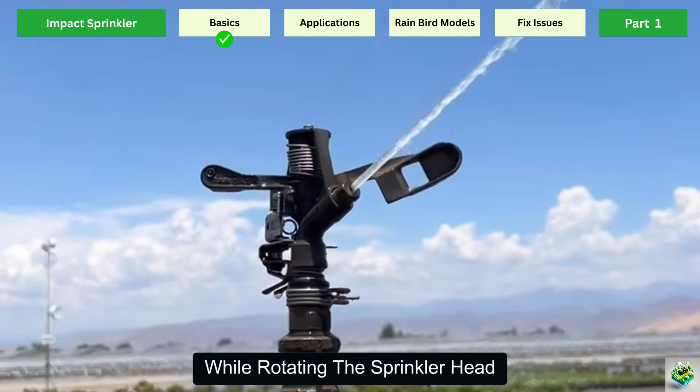Part 1. Understanding impact sprinklers. Impact sprinklers are instantly recognizable by their distinctive clicking sound and rotating spray pattern. Water flows through the sprinkler body and strikes a spring-loaded arm. This arm deflects the water stream while rotating the sprinkler head. Each swingback creates that characteristic clicking sound and moves the head a few degrees further.

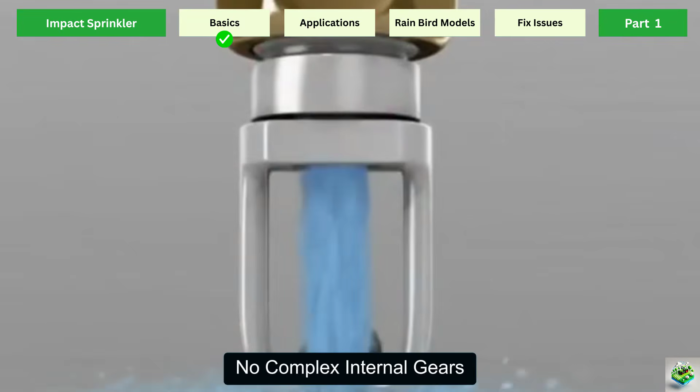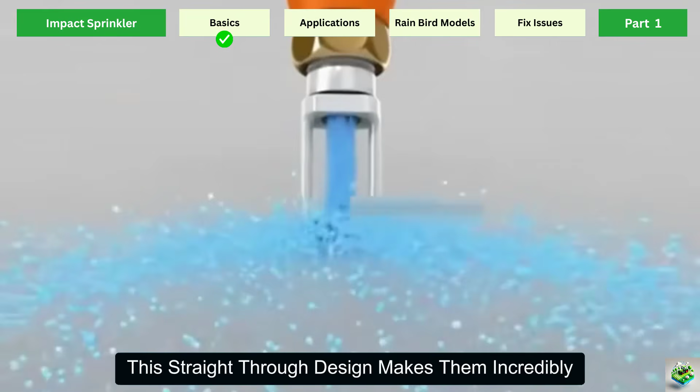The genius lies in simplicity. No complex internal gears, chambers, or tiny passages. Water flows straight through, hits the deflector arm, and sprays outward. This straight-through design makes them incredibly reliable. Fewer internal parts mean fewer failures. The mechanical action runs entirely on water pressure, with no electricity needed.

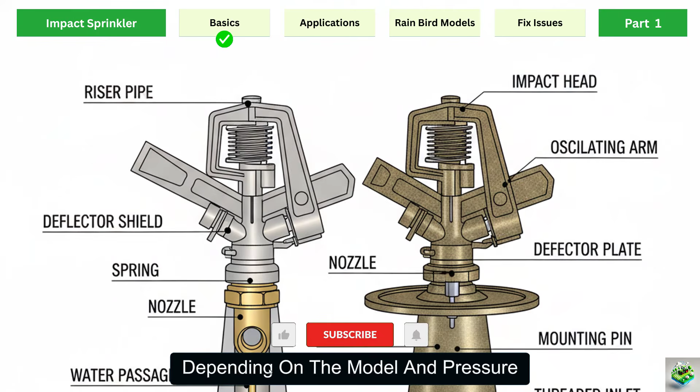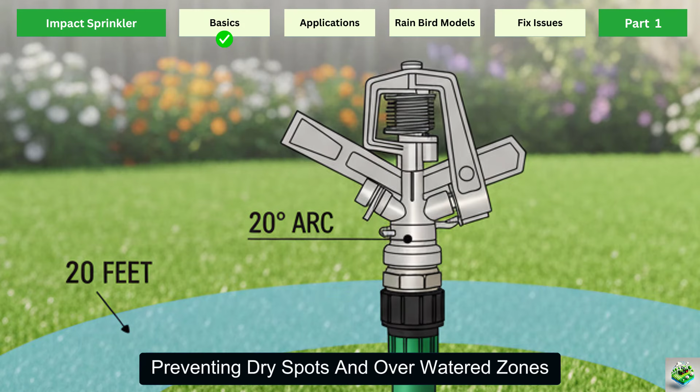Coverage ranges from 20 feet to over 50 feet depending on the model and pressure. Spray patterns adjust from narrow 20-degree arcs up to full circles. This flexibility adapts to any landscape shape. The rotating action distributes water uniformly, preventing dry spots and overwatered zones.

The real advantage is handling tough water conditions. That open flow path works perfectly with hard water, well water, and reclaimed water containing minerals and particles. These conditions clog other sprinkler types quickly, but impact sprinklers keep running. Durable construction using brass, bronze, or quality plastics means years of reliable service in harsh outdoor conditions.

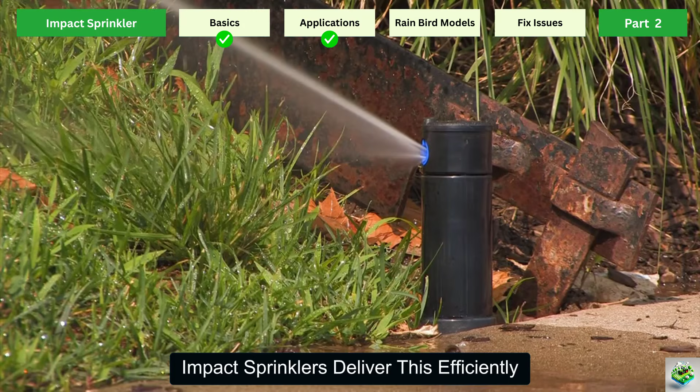Part 2. Where impact sprinklers excel. Now that you understand how impact sprinklers work, let's see where they outperform other irrigation options. Their straight-through flow and mechanical simplicity create real advantages in specific situations. Large area coverage is their domain. Big lawns, sports fields, and pastures need substantial coverage per head. Impact sprinklers deliver this efficiently, meaning fewer sprinklers, simpler systems, and lower installation costs.

Golf courses use them extensively for fairways. Parks and commercial landscapes rely on them for efficient coverage. Agricultural applications demand impact sprinklers because they handle challenging water quality. Well water contains minerals, sand, and sediment that destroy other sprinkler types within months. Impact sprinklers run reliably year after year in these conditions. Vegetable gardens, orchards, and crop irrigation depend on this durability. Consistent water distribution without constant maintenance makes them ideal for large areas.

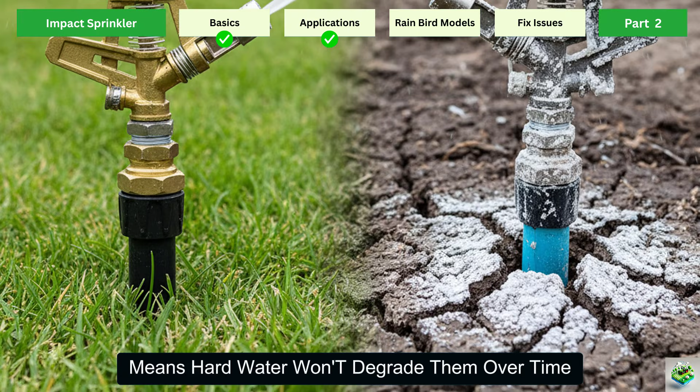Rural properties with well water benefit enormously. High mineral content clogs spray heads repeatedly. Impact sprinklers eliminate this frustration. Corrosion-resistant construction means hard water won't degrade them over time. This makes them essential where water quality compromises other systems.

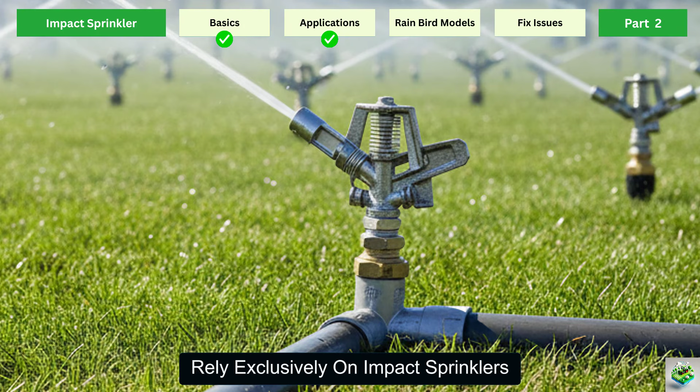Reclaimed water irrigation faces similar challenges. Reclaimed water is sustainable but contains particles and minerals. Impact sprinklers handle it without issues, making them perfect for eco-conscious projects. Many municipalities using reclaimed water rely exclusively on impact sprinklers.

Slopes and uneven terrain favor impact sprinklers too. Riser-mounted designs position at various heights for landscape features. Strong throw distance covers difficult areas strategically. Pop-up versions work in manicured lawns while elevated models handle rough terrain and tall grass.

Part 3. Rain Bird Impact Sprinkler Models.

Understanding where impact sprinklers work best leads us to choosing the right model. Rain Bird offers 3 main options, each designed for specific needs and budgets. The 35A series is Rain Bird's premium brass impact sprinkler.

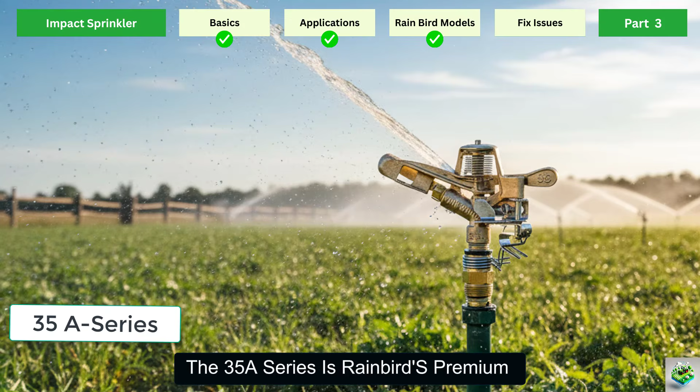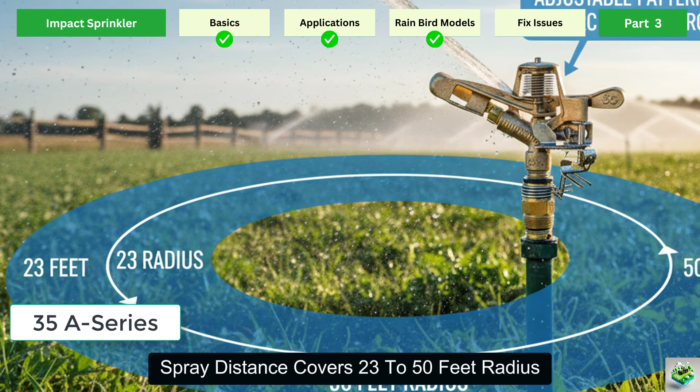Heavy-duty brass, bronze, and stainless steel construction outlasts zinc alternatives by years. Spray distance covers 23 to 50 feet radius, with adjustable patterns from partial to full rotation. The 3/4-inch connection handles high water flow for large areas.

Choose this for commercial applications, agricultural use, or anywhere maximum durability matters. Metal construction handles harsh conditions, hard water, and continuous operation without breaking down.

The P5R plastic impact sprinkler offers excellent residential value. High-impact polymer and stainless steel components provide years of reliable service despite the plastic body. The brass-weighted spray arm controls water precisely and prevents overspray onto buildings.

Coverage adjusts from 20 to 360 degrees with 24 to 45 feet spray distance. This model balances affordability with Rain Bird quality, perfect for home gardens, landscaping beds, and residential systems.

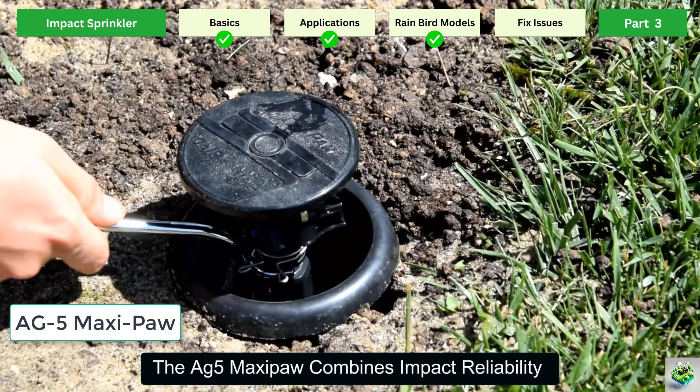The AG5 Maxi-Paw combines impact reliability with pop-up convenience. Traditional impact sprinklers stay visible and interfere with mowing. The AG5 retracts flush with ground when off, then pops up 3.5 inches during watering. This height clears tall grass while staying hidden when not in use.

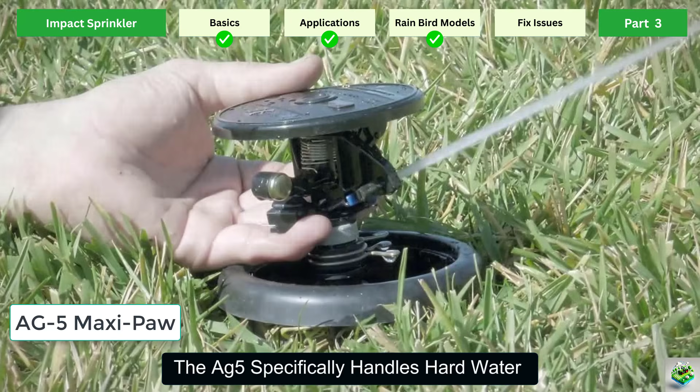The AG5 specifically handles hard water and high mineral content. Its design makes it exceptionally reliable with reclaimed water systems. It includes 5 interchangeable color-coded nozzles requiring no tools to change. Adjust flow rates and coverage easily as needs change. The double-weighted arm provides slower rotation and increased throw distance.

Many Rain Bird models feature Seal-A-Matic check valve technology. This prevents low head drainage, where lower sprinklers drain pipes when the system shuts off. The SAM feature seals automatically, holding up to 7 feet elevation change. This stops puddling, erosion, and water waste while protecting your landscape.

Part 4. Setup and Maintenance. Selecting the right Rain Bird model sets you up for success, but proper setup and basic maintenance ensure years of trouble-free operation. Let's keep this simple and practical. Start with the correct installation.

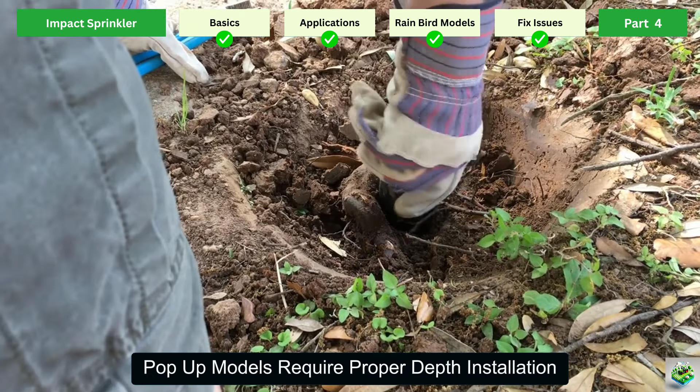Riser-mounted models need stable, level mounting at the right height for your coverage area. Pop-up models require proper depth installation, so they extend and retract smoothly. Position sprinklers based on their throw distance and ensure adequate overlap between heads for complete coverage.

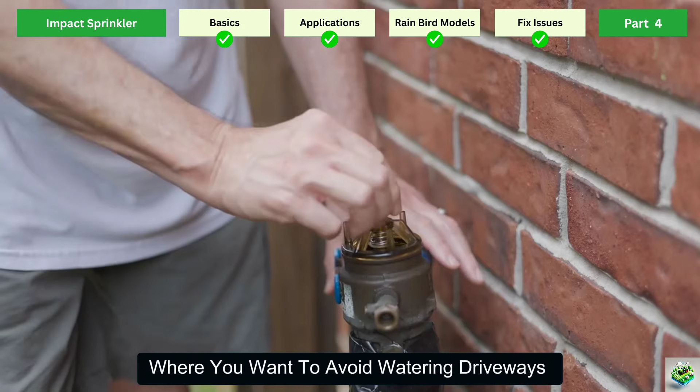Adjust the spray arc using the adjustment collar or trip tabs. Set these to stop rotation where you want to avoid watering driveways or buildings. For full circle coverage, adjust or remove the trip mechanism. The deflector flap controls spray distance. Make these adjustments when the system is running so you can see the results immediately.

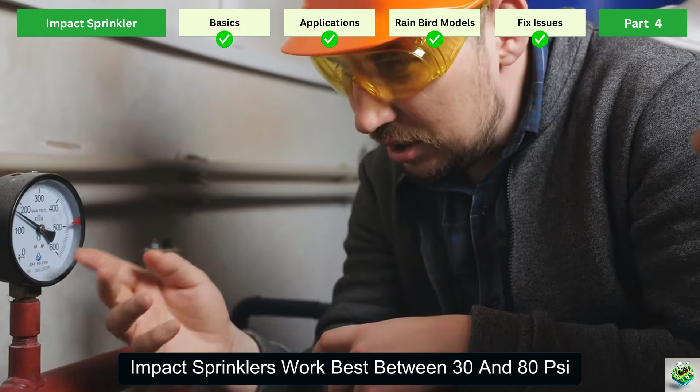Check your water pressure. Impact sprinklers work best between 30 and 80 psi. Too low means poor rotation and short throw. Too high causes misting and uneven coverage. If needed, add pressure regulators to optimize performance.

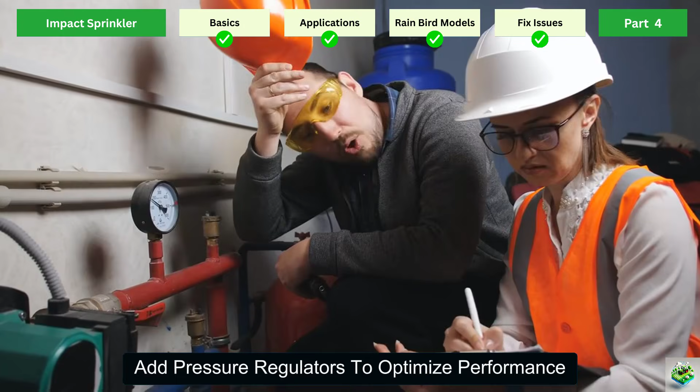For maintenance, clean the inlet filter screen when you notice reduced flow. Check that the drive arm swings freely. If rotation seems sluggish, debris around the bearing is usually the problem. A quick cleaning fixes this. Inspect nozzles for wear if spray patterns become uneven. Rain Bird offers replacement nozzles that restore original performance.

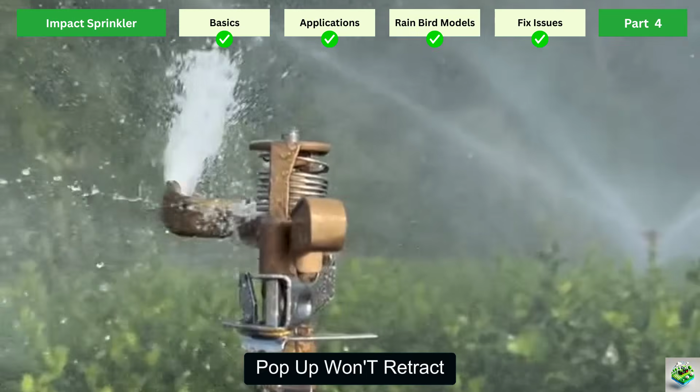Common problems have simple fixes. Sprinkler won't rotate? Check for debris around the drive arm. Weak water flow? Clean the inlet filter. Uneven spray? Inspect the nozzle. Pop-up won't retract? Check the spring mechanism for obstructions.

Before winter in cold climates, drain your system completely to prevent freeze damage. At season start, run the system and check each sprinkler for proper rotation and coverage. Address issues immediately for best results.

Whether you choose the brass 35A series, plastic P5R, or pop-up AG5, these simple maintenance steps ensure maximum performance and longevity. Rain Bird provides detailed guides and support on their website for specific troubleshooting and technical specifications. That wraps up our complete guide to Rain Bird impact sprinklers.